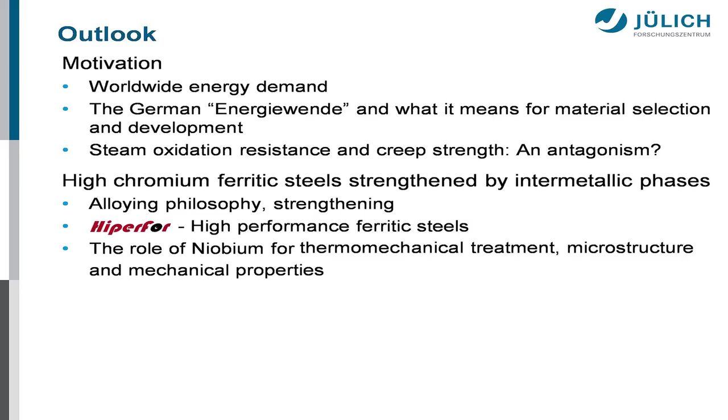I'm going to talk on the specific role of niobium for thermomechanical treatment, microstructure, and mechanical properties of our so-called HiperFer steels, which means high-performance ferritic steels, a further development of the steels described in the award-winning paper. In the end, I'm going to conclude my talk and give a short outlook on future perspectives, our development goals, and the partners we are working with right now.

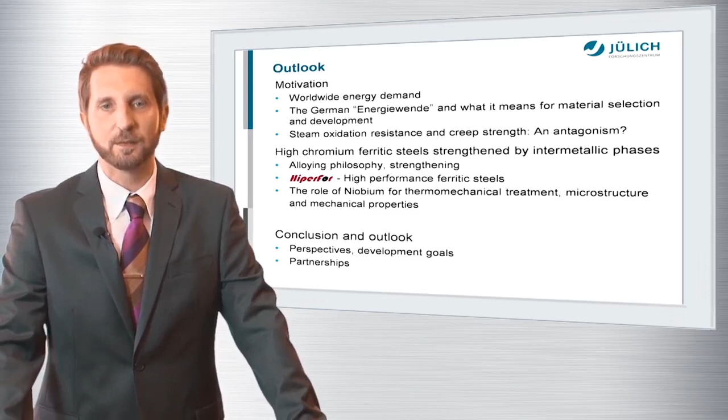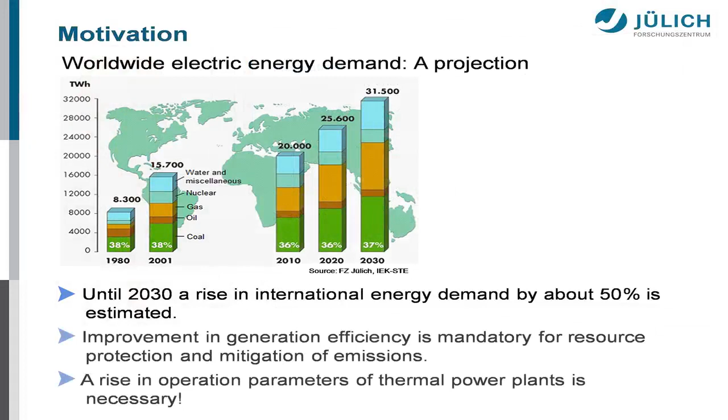Whatever projection on worldwide electric energy demand you look at, they all have in common that until 2030 they predict a rise in international energy demand of about 50%. That means that if we want to go for resource protection or mitigation of emissions, we have to reach some improvement in generation efficiency. And this is only possible by a rise in the operation parameters of thermal power plants. For this, we need new and improved materials.

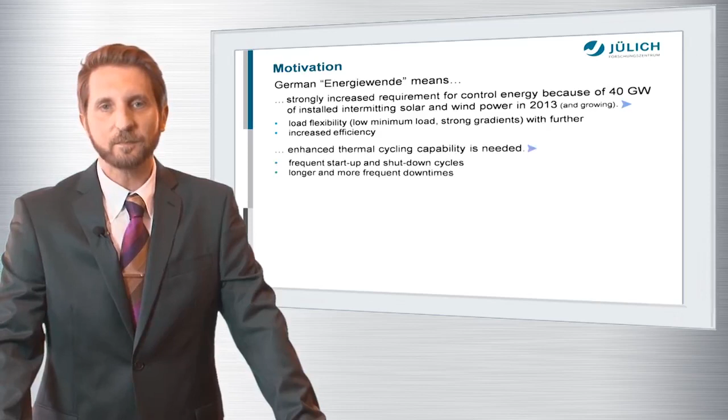Furthermore, the German Energiewende, which originally meant the turn away from nuclear power generation and in the future will mean the turn away from fossil sources of energy towards regenerative power sources, will pose a strongly increased requirement in the amount of required control energy, because in 2013 we already had about 40 gigawatts of installed intermittent solar and wind power. That means load flexibility in combination with further increased efficiency is already needed right now for the backing thermal power plants. This means enhanced thermal cycling capability will be needed in the future.

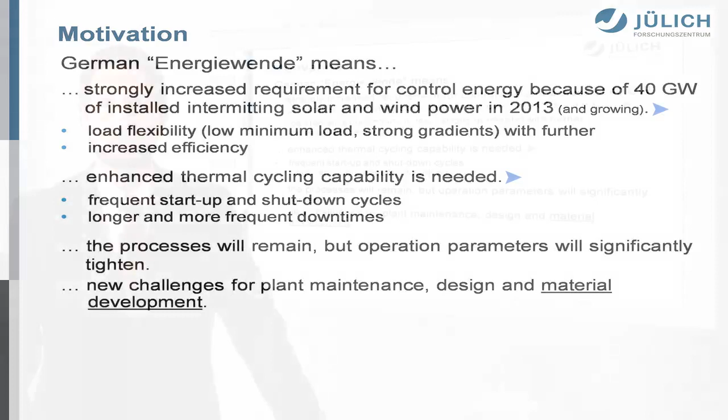We will have more frequent startup and shutdown cycles and longer and more frequent downtimes. To summarize this, in my opinion, the processes will remain, but the operation parameters will significantly tighten. That means, for sure, new challenges for plant maintenance, design, and especially for the design of future materials.

Let me give you a short introduction on the steam oxidation and creep strength properties of state-of-the-art 9 to 12 chromium ferritic martensitic steels. You can see them here lined up as a function of their chromium content, starting out with P92 as a 9 chromium steel, going up with higher chromium content to VM12 and X20, which are 12 chromium steels.

You can see the oxidation rate, represented by the black line, decreases with increasing chromium content. In turn, that means steam oxidation resistance rises with rising chromium content. But unfortunately, on the other hand, represented by the red columns, the creep strength of these materials drops with rising chromium content.

As we want to go up to higher temperatures of about 650 degrees C, if you want to maintain sufficient steam oxidation resistance, you have to go up in chromium content. This even sharpens the problem with the drop in creep strength with rising chromium content. This is, for example, due to Z-phase formation and delta ferrite formation, which troubles you with complete martensitic transformation upon cooling, and that leads to the drop in long-term creep strength.

To summarize this, in case of the state-of-the-art creep strength enhanced ferritic martensitic 9 to 12 chromium steels, creep strength and steam oxidation resistance together seem to be an antagonism. That is one of the main reasons why most, or let's say all, the efforts in creating new high-strength, sufficiently steam oxidation resistant 9 to 12 chromium steels failed during the last 20 years.

So having a look at the material classes that are available for power plant application, for structural application in thermal power generation, the most important material class today is the ferritic martensitic steels I've been introducing to you.

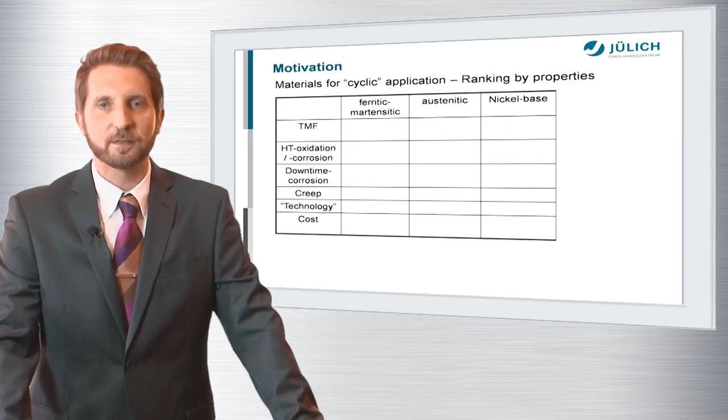Furthermore, we do have austenitic steels and high-performance nickel-based alloys. And in the motivation part, in the very beginning, I've been talking about cyclic power plant operation.

If we now rank these material classes by material properties which are crucial to cyclic operation, you first have to mention TMF, thermomechanical fatigue resistance. Even if the ferritic martensitic steels are the most important material class today, there is not a lot known about thermomechanical fatigue resistance of these materials.

All the ferritic martensitic materials are right now clearly limited by their high temperature oxidation and corrosion issues because of the relatively low chromium contents of about 12%. Creep is a property which is okay because they have been designed for that.

Technology means all the issues which are touched by production of semi-finished products, of components, and the construction and erection of whole power plants. This is not a problem because the materials are state-of-the-art, and cost is not a real issue because these are the benchmarking materials.

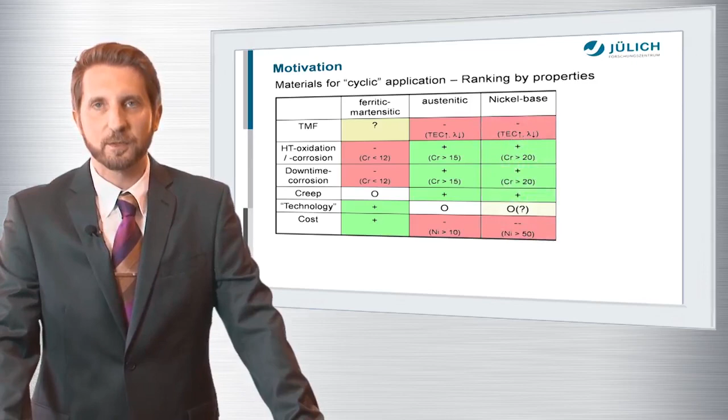If we now look into alternative materials like the austenitic and the nickel-based alloys, the picture is a little bit reversed, a little bit different. Typically, their thermomechanical fatigue resistance is considered to be worse because their thermal expansion coefficients are much higher and their heat conductivities are lower. Oxidation and corrosion issues should not be a problem because most of these grades feature chromium contents higher than 15% or even 20% in case of the nickel-based alloys.

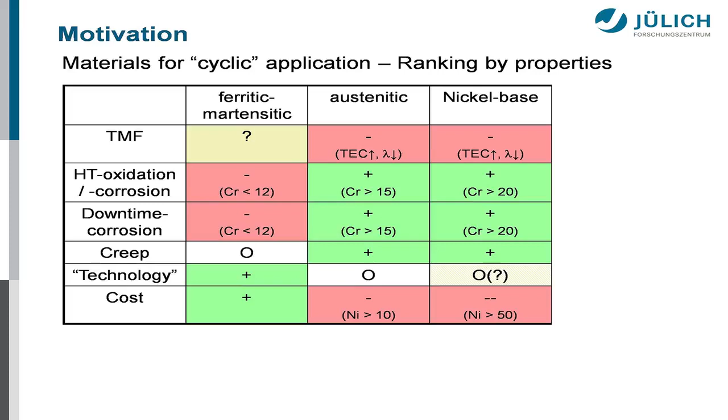Creep resistance is not a problem too because these materials are stronger. Technological issues are, let's say, more or less solved because a lot of money has been invested, especially in the nickel-based field during the last 10 to 15 years.

But for sure, what is a problem today and will remain a problem is the higher cost implied by the use of austenitic steels and especially high-performance nickel-based alloys, because the nickel contents, especially in case of the nickel-based alloys, are higher than 50%, which leads to exaggerating costs.

So the question is, there is a fourth material class, the ferritic steels. These steels traditionally are not regarded for structural application in high-temperature power generation, for the reason that this material class is typically considered to be not creep strong enough.

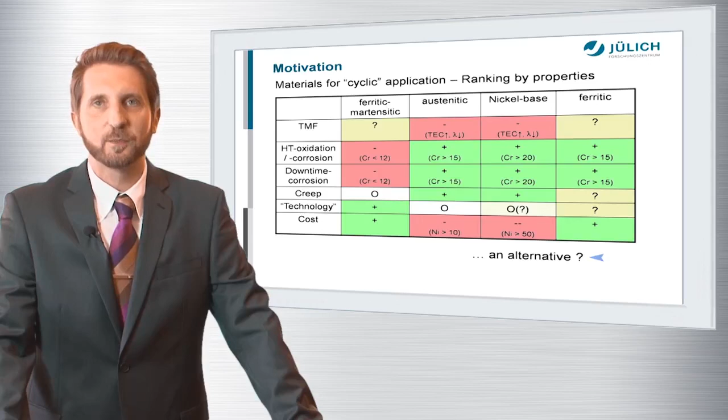But what is for sure is that corrosion issues should not be a problem, because the ferritic stainless steels mostly feature chromium contents higher than 15%, which would be enough. And cost should be another advantage because they will not be much more expensive than the ferritic 9 to 12 chromium steels. But if you have a look into the ferritics column, you see that a lot of question marks gather in this column.

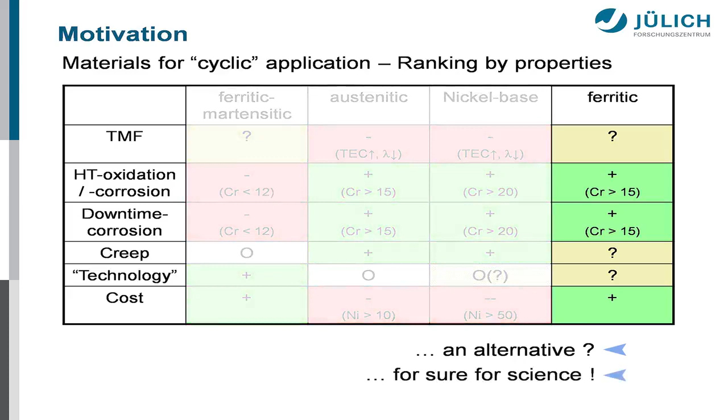The question is, could such a material based on a fully ferritic steel be an alternative? And because there are so many question marks, our decision was: for sure this is interesting for science, so let's see if this can be interesting for practical application too.

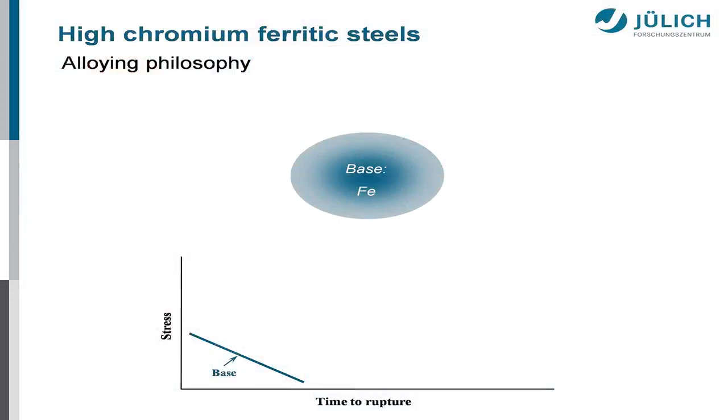So this was the starting point of materials development, the starting point of the development of a fully ferritic, high chromium stainless steel. You start out with an iron base, you put in some solid solution strengtheners like chromium, tungsten, and niobium. Chromium was included for corrosion resistance and steam oxidation resistance, and the solid solution strengthening mainly stems from tungsten and niobium.

So this solid solution strengthening gives a boost in the creep strength of the matrix, but this is still not enough. So we'll go further for precipitation strengthening.

You put in some more tungsten, some more niobium, a little bit of silicon. You restrict the nitrogen and carbon contents to very low levels to force the precipitation of a mixed Laves phase. The composition is given up there on the slide.

Now I have to point out that our materials are completely ferritic at any temperature, so they do not undergo martensitic transformation upon cooling.

And that means that if you want to go for enhanced dislocation strengthening, like it is done in the martensitic steels just by the martensitic transformation, you have to go for specialized thermomechanical treatment. This gives another great leap in creep strength, but as always in high temperature materials, whether this boost in creep strength is really stable is a question of microstructure stability in the long term.

Historically, our steel development dates back to the commercial grade Crofer 22 H, a 22 chromium ferritic stainless steel designed at our institute together with VDM Metals in Germany. Originally this grade was developed for application in high temperature solid oxide fuel cells, for a temperature range of about 700 to 900 degrees C.

In the course of this alloy development, approximately 45 trial alloys were produced. Some featured fluctuations in chemical composition, like lowered chromium content in the low chromium alloy, differences in tungsten content for the zero titanium alloys as named on the slide, differences in niobium content, fluctuations in silicon content, and changes in titanium content. The mechanical properties showed very promising results, for example for creep strength at lower temperatures in the range of 600 to 650 degrees C, which is what we described in the award-winning paper.

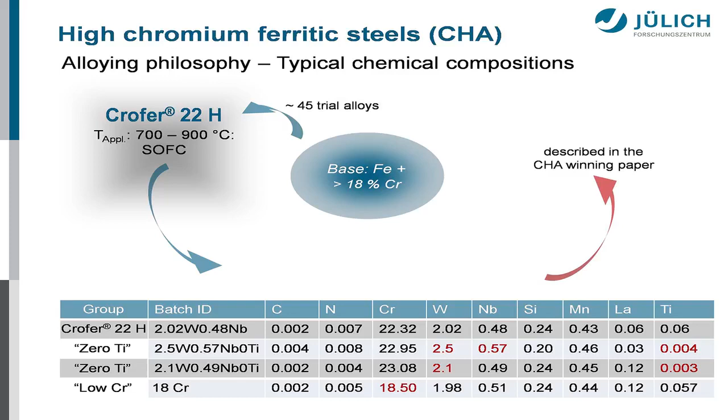So what is the specific role of niobium in these alloys? To answer this, we have to look into some simplified phase diagrams, but I'm not going very deeply into detail.

To keep it simple, if you want to strengthen a fully ferritic steel by intermetallic phases using just simple tungsten alloying, you have to go up to a tungsten content of approximately 7 weight percent to reach sufficient creep strength. That means such an alloy would be very expensive, hard to process, and if you think about weldability, such a high tungsten alloy would be a nightmare.

If you go instead for combined alloying with niobium, as shown on the right-hand side, you see that very small amounts of niobium are already sufficient to reach reasonable creep strength in these materials. This is due to the formation of the mixed Laves phase that I mentioned a few slides ago.

So frankly speaking, to keep it simple, niobium replaces tungsten. It is incorporated into the Laves phase and refines it, forming smaller particles. Furthermore, it boosts precipitation kinetics of the Laves phase and forces a so-called high-temperature Laves phase with a higher dissolution temperature.

That can be seen on the right phase diagram, represented by the blue curve. The dissolution temperature is somewhere close to 970 degrees C. In comparison, the Laves phase in the 7 tungsten alloy dissolves at approximately 670 degrees C, so the Laves phase in the combined alloying material should have much better long-term stability.

What is also beneficial with niobium alloying is that you do not form the Chi phase. The Chi phase is represented by the red curve on the left-hand side, and you see that in the application temperature range of approximately 600 to 650 degrees C, there's a very steep phase change from the Laves phase to the Chi phase. This is really not what you want if you think about cyclic application, where you have temperature fluctuations quite frequently.

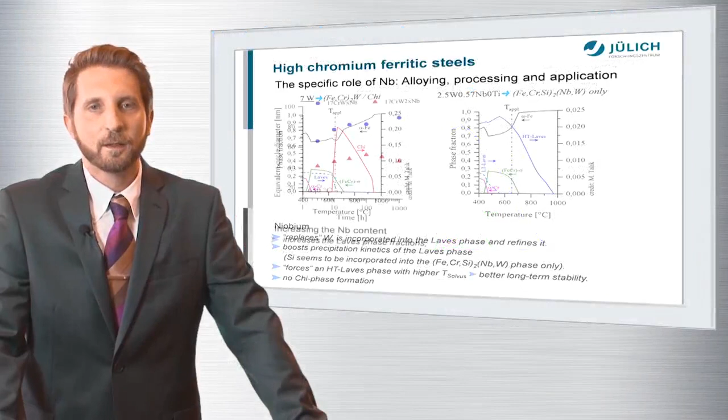So if we now increase the niobium content, it raises the volume fraction of the Laves phase. This is shown in these two micrographs taken from 650 degrees C annealing after 3 hours. The upper picture is from one of our new trial alloys with 17% chromium.

This alloy has a specific tungsten content and a single niobium content. The lower picture is from an alloy quite similar considering the chromium and tungsten content, the only difference being that the niobium content is doubled. What you can nicely see is that the alloy with the higher niobium content forms much smaller particles, reflected in the particle diameter as a function of time in the diagram.

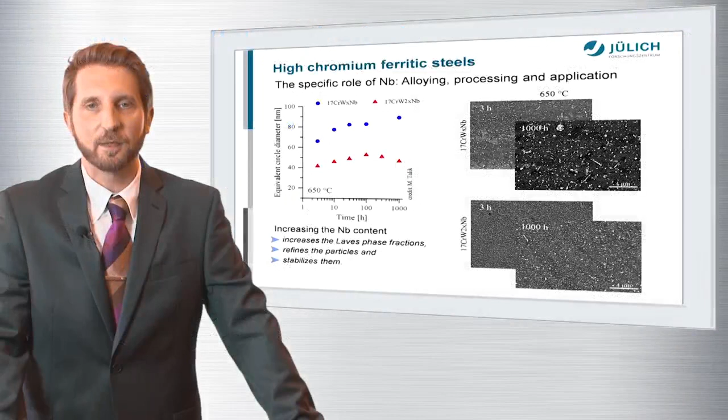The blue curve is for single niobium alloying, the red curve is for double niobium content, and you see the particles are much smaller. In the long term, up to 1,000 hours so far, the higher niobium content seems beneficial for stabilization of the particles, which can be nicely seen in the micrographs taken after 1,000 hours. Doubling the niobium content leads to less coarsening of the particles, which is very beneficial for long-term application of such alloys.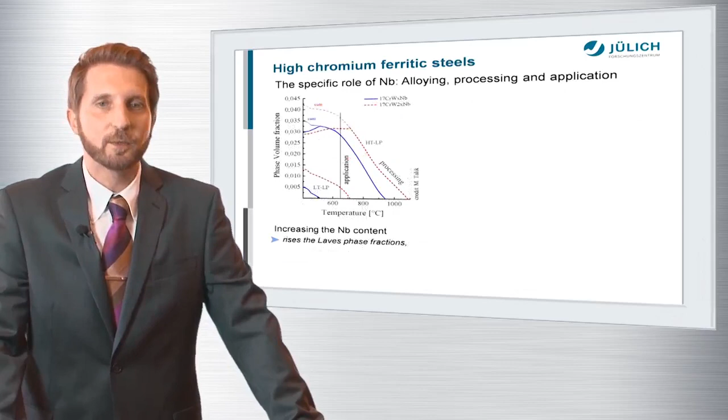Furthermore, doubling or increasing the niobium content does not only have a direct impact on application, it also has a direct impact on processing, and this is depicted in that graph. Again, the color code is the same: blue is the base composition, red is the composition with doubled niobium content. You can see that on the high temperature end, the dissolution temperature shifts by approximately 100 degrees C, and this does not only lead to higher long-term stability, it also means we have to change the process if you go for rolling or forging of these materials.

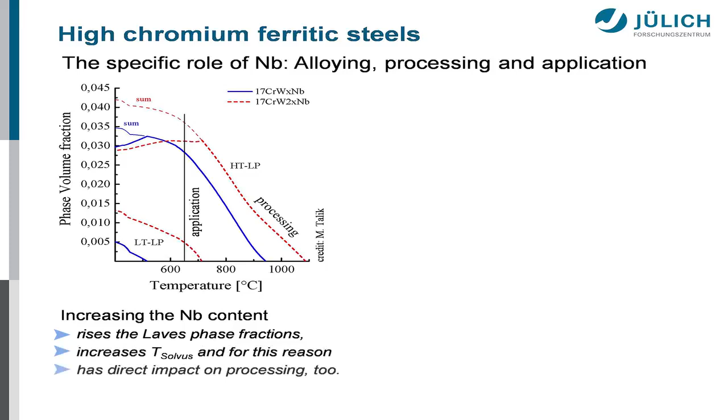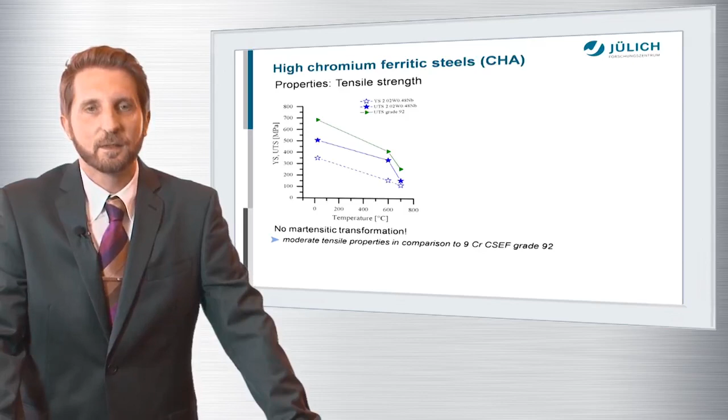So now coming to the properties, starting out with mechanical properties, the tensile strength. As I already pointed out, our materials are fully ferritic. We do not have martensitic transformation, and that's the reason why we only reach moderate tensile properties in comparison to a 9 chrome steel, grade 92, represented by the green curve, the green triangles. The filled blue stars represent a chemical composition quite close to the commercial Crofer 22H alloy, and you can see it's far below, but this is not really a problem because we can alter the tensile properties just by processing, which is what I'm going to demonstrate to you in the following.

At first, we'll have a look into creep strength, this time for 600 degrees C. There are 3 groups of alloys. First is the Crofer 22-like specification, which features a chromium content of 22 weight percent, a tungsten content of 2%, and a niobium content of approximately 0.5%. There is a group of alloys with higher tungsten and niobium contents, and a low chromium version, which has the same tungsten and niobium content as the Crofer 22H specification. This alloy just features a lower chromium content of about 18 weight percent.

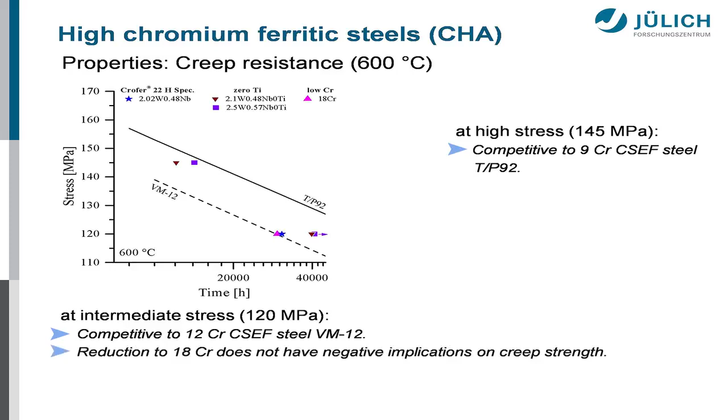If we compare the creep performance of these trial alloys to ferritic martensitic grades to benchmark this, we see that at a high stress level of about 145 MPa, the higher tungsten and niobium alloys are competitive to the 9 chrome grade TP92, which is the benchmark today in power plant application. At an intermediate stress level of about 120 MPa, the baseline Crofer 22 composition is still competitive to the most steam-oxidation-resistant 12 chromium ferritic martensitic steel VM12, and the higher tungsten and niobium content materials perform much better.

What is a very interesting and important finding in this circumstance is that the reduction to 18% chromium does not have negative implications on creep strength. Just compare the creep performance of the original Crofer 22H specification and the low chromium, 18 chromium version. You see that there's not a big difference, and this is really an interesting finding which was documented in the award-winning paper.

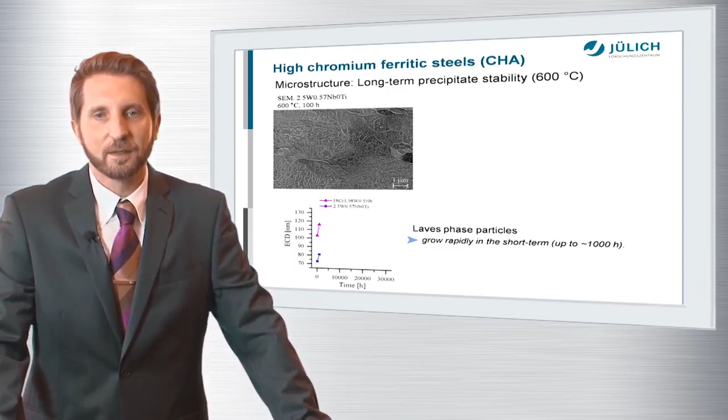Some more words on secondary phase formation. Always when you're talking about ferritic high chromium stainless steels, you have to deal with the sigma phase, and this phase is very undesirable because it segregates preferentially to grain boundaries. If it forms continuous films at the grain boundaries, it might deteriorate the ductility in the long term, which is very undesirable. Unfortunately, the sigma phase forms in all the 22 chromium alloys, as you see in the micrograph. But, and this is very beneficial, the cutback in chromium content to 18 weight percent helped a lot to mitigate formation of the iron chromium sigma phase.

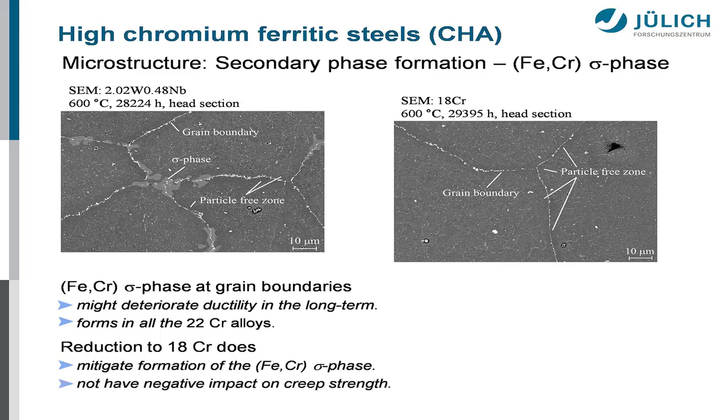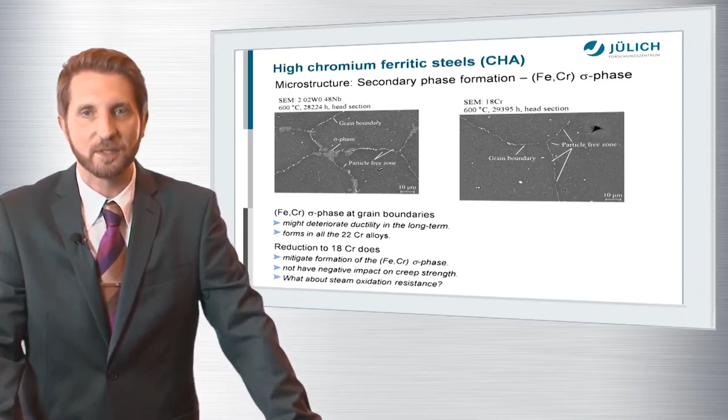And like I demonstrated to you some slides ago, this does not have negative impact on creep strength, but the question remains, what about steam oxidation resistance if we cut back the chromium content? And this is what you can see here.

This diagram depicts weight changes or weight gains during annealing in simulated steam environment at 600 degrees C. On the upper end you see the performance of the 9 chromium martensitic steels, approximately an order of magnitude lower the performance of the 12 chromium steels, and approximately another order of magnitude lower at the lower end of the high chromium ferritic steels.

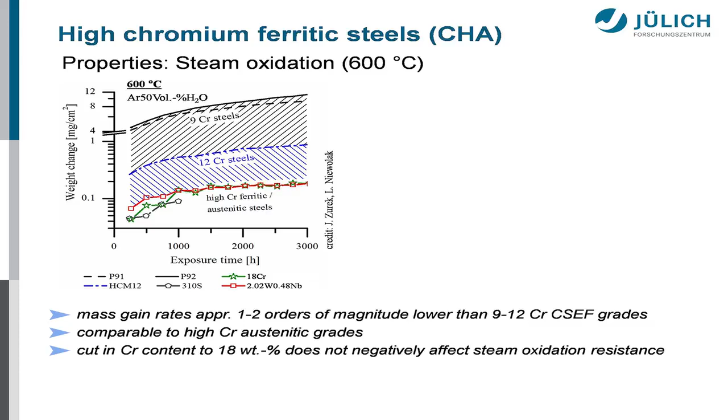We have the weight gain rates of our high chromium ferritic steels, which is mostly comparable to high chromium austenitic grades. What's nicely depicted here is the comparison of the green 18 chromium curve and the red 22 chromium curve. They're more or less on the same level, meaning the cutback in chromium content to 18 weight% does not negatively affect steam oxidation resistance, which was one of the basic findings in the award-winning paper.

As a preliminary conclusion, we can state that ferritic steels, which are strengthened by intermetallic phase particles, offer promising creep strength and favorable steam oxidation resistance in combination, which is quite a unique thing. But there remain questions beyond.

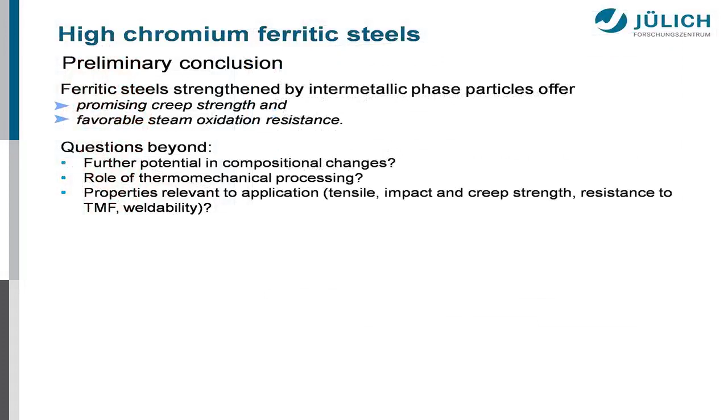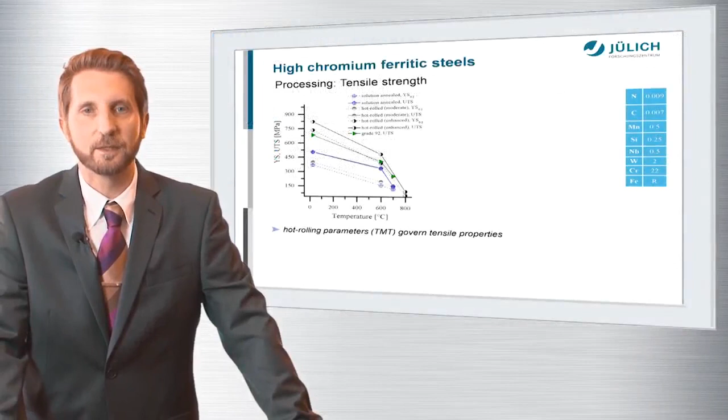The first question for sure is, what is the further potential in compositional changes? What is the role of thermomechanical controlled processing? And what properties relevant to application can be reached with that? This is what we concentrated on during the last approximately 2.5 years.

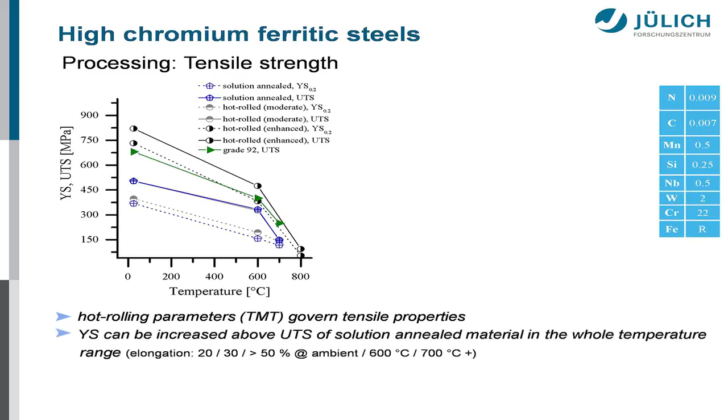Coming back to tensile strength, again doing the benchmarking against the martensitic grade 92, you can see that by changing the hot rolling parameters, the yield strength of our high chromium ferritic steels can even be tuned beyond the ultimate tensile strengths of solution annealed material. This can be done over the whole temperature range with still sufficient and reasonable ductility. The takeaway message is the tensile properties we can reach in our fully ferritic grades are comparable to ferritic martensitic grades.

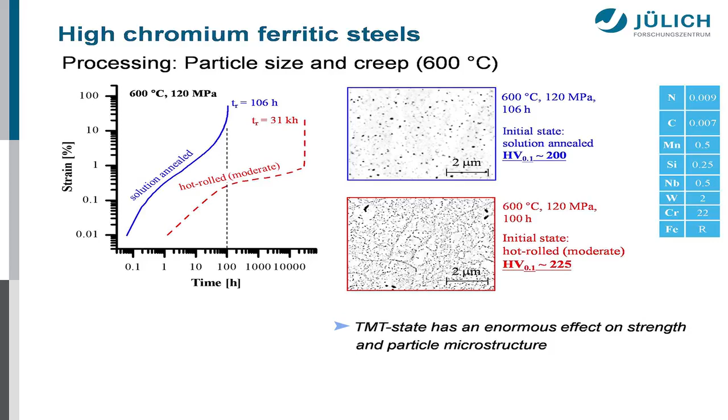But if you do the same experiment with a moderately hot rolled material of the same chemical composition, you can see in that micrograph below in the red box, the number of particles is much higher than in the solution treated state. The particles are much smaller, and this has a very decent impact on the creep properties. The shape of the creep curve changed quite a lot, and rupture appeared after approximately 30,000 hours. So a thermomechanical treatment state has an enormous effect on creep strength and particle microstructure.

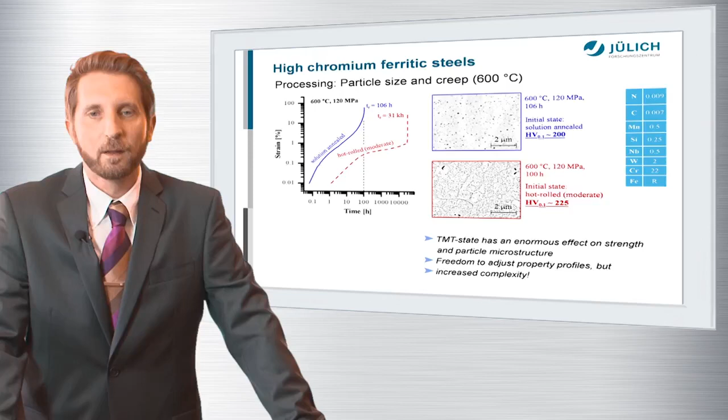This means, on the one hand, that we have great freedom to adjust property profiles, but on the other hand, this means that such materials will for sure be more complex in development and processing than the materials that we have today.

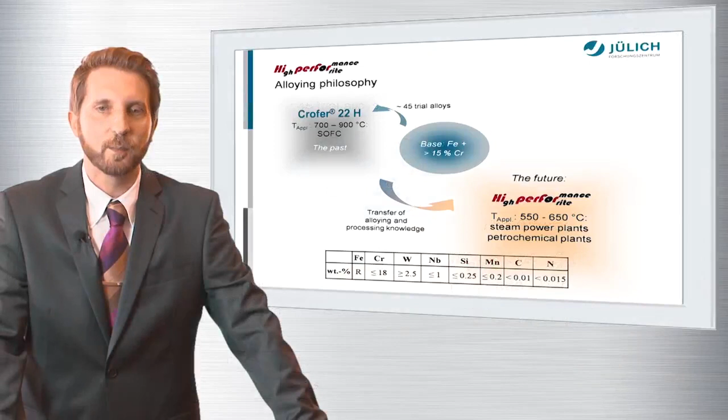So, coming back to that representation of what we did in the past, taking all this knowledge on alloying and processing together, we right now try to transfer this into a new material class, which is called the high-performance ferrite materials, and we're going to optimize this for steam power plant application in a temperature range of 550 to 650 degrees C, or maybe even for application in petrochemical plants where higher corrosion resistance is needed.

All of these trial alloys feature a further reduced chromium content of about 17%, combined with enhanced tungsten and niobium content for increased Laves phase formation, and optimized rolling parameters, and for this reason yield creep strength which is already far beyond the ferritic martensitic grade 92. This is achievable without sigma phase embrittlement. This makes us very proud. But most of the very interesting long-term low-stress experiments are still running, still in progress.

So I've been talking about thermomechanical treatment quite a lot, being aware of the fact that it's not desirable to first invest a lot of effort tuning a microstructure by processing, and then later destroy it by welding. So we had a look into heat treatment too.

Furthermore, these heat treatments are very effective in homogenizing the hardness profiles after welding, and they do not harm the creep strength of the hot rolled material. So this really opens up the gate to application, for example, in the solution treated state where you don't have to go for thermomechanical processing.

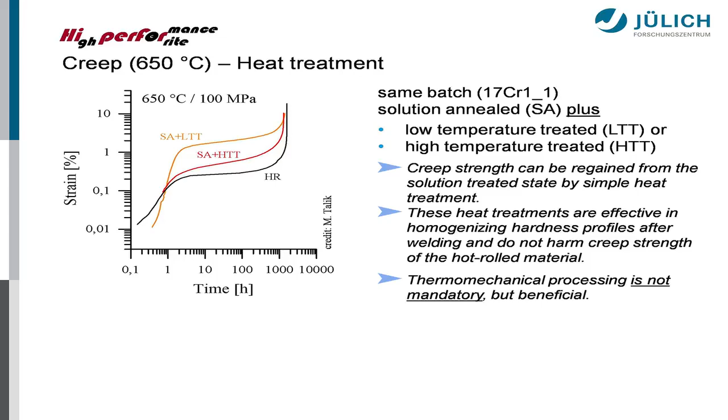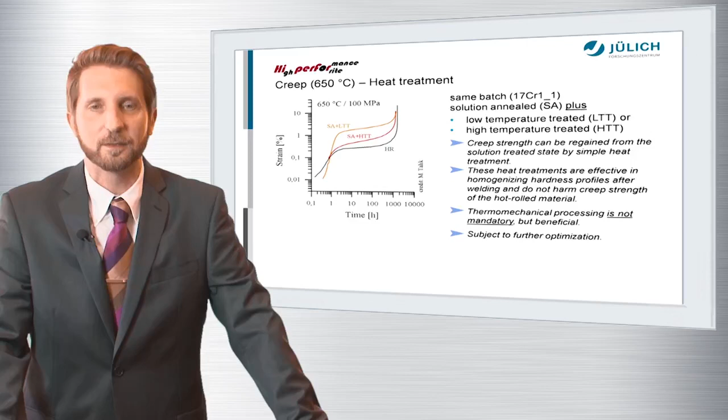So the takeaway message is thermomechanical processing is not mandatory, but it can be very beneficial if you want to go for very high strength applications. For sure, this is still subject to further optimization, so we're far away from being finished with that.

In the motivation part, I've been talking about thermomechanical fatigue resistance for cyclic power plant operation. And that is why I brought some data on thermomechanical fatigue.

What is done in a thermomechanical fatigue test is you just take a specimen and cycle it through a given temperature range, in this case from 50 to 650 degrees C, employing quite steep heating and cooling rates, in this case 10 Kelvin per second. You do not go for holding times at the minimum and maximum temperatures because you want to restrict creep as far as possible.

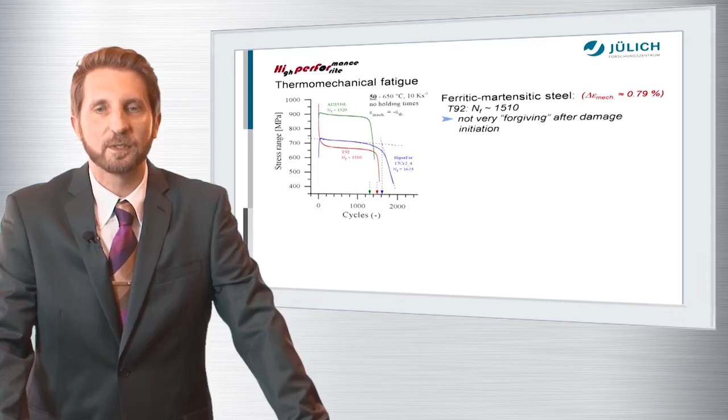Red is a ferritic martensitic grade, again T92, the most creep-resistant material available today. It reaches a very high stress range in the initial state because of excess dislocation density from martensitic transformation. But this recovers quite rapidly during the first, let's say, 50 cycles before the material enters a stable phase, and after approximately 1500 cycles, damage and failure comes quite rapidly, so the material is comparatively unforgiving.

In case of the austenitic grade, here alloy 316, represented by the green curve, you see that this material performs completely differently. You do have pronounced hardening in the initial phase, then you again enter a stable phase, and after approximately 1300 cycles, damage comes rapidly too. So obviously this material seems to be unforgiving too.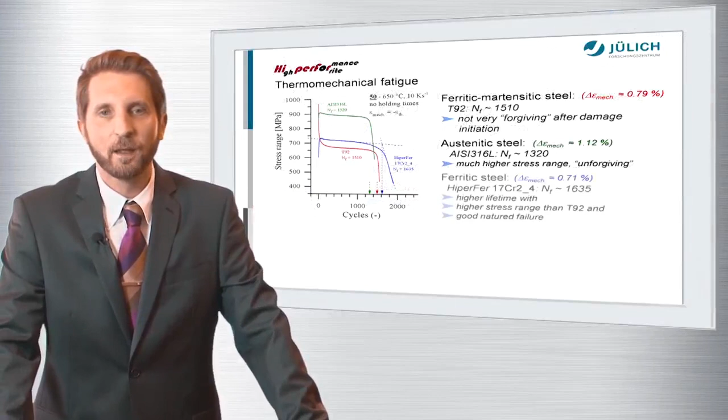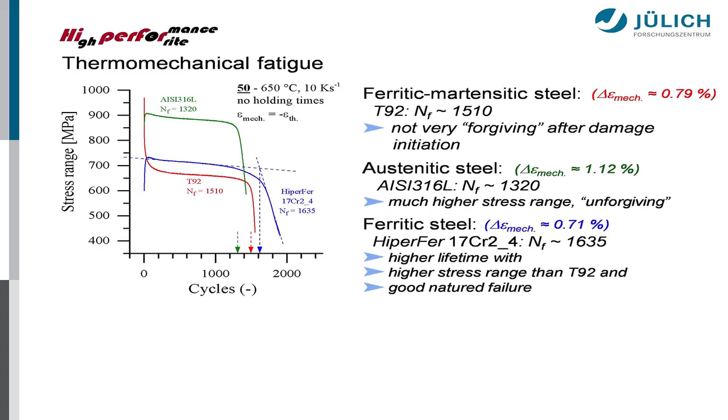And the blue curve represents our new ferritic HiperFer 17Cr2_4 grade. This one reaches higher lifetime in combination with higher stress range than, for example, the ferritic martensitic grade, and it seems to have more decent failure behavior, which is quite positive.

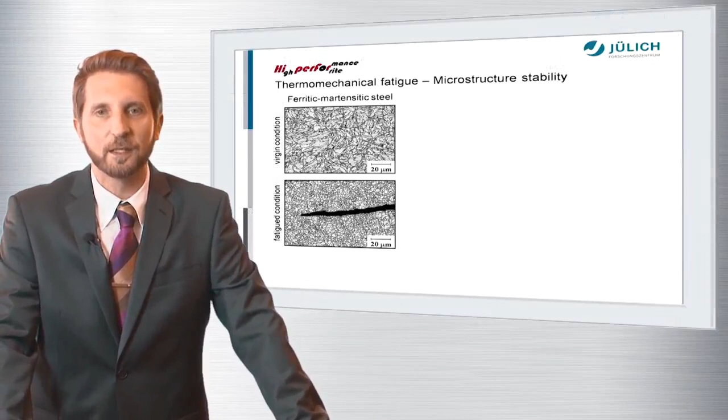The microstructural reason for this behavior is the following: if you take the ferritic martensitic steels, you can see in the virgin condition this well-defined martensitic microstructure, and in the fatigue condition depicted below, this microstructure is completely lost. Ferritic martensitic steels suffer pronounced recrystallization in severe thermomechanical fatigue loading, which later causes premature failure.

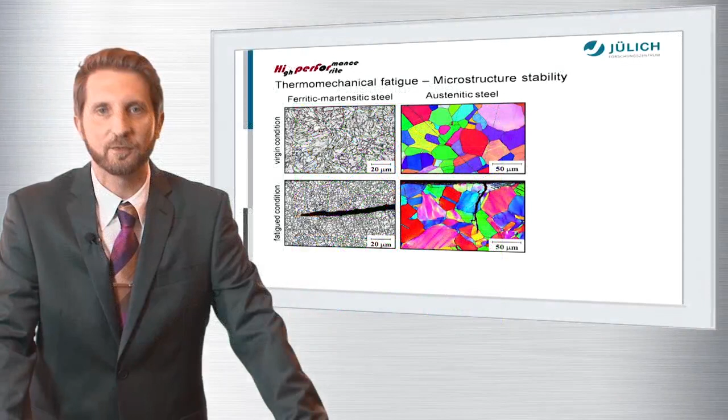In case of the austenitic steel, such recrystallization does not occur, and the grain structure is completely stable over the whole range. The premature failure is more or less owed to the comparatively high thermal expansion coefficient of these materials, meaning the amount of plastic strain energy per cycle is much higher than for the ferritic martensitic and ferritic steel. In case of the ferritic materials, microstructure remains stable too, so we don't suffer any recrystallization.

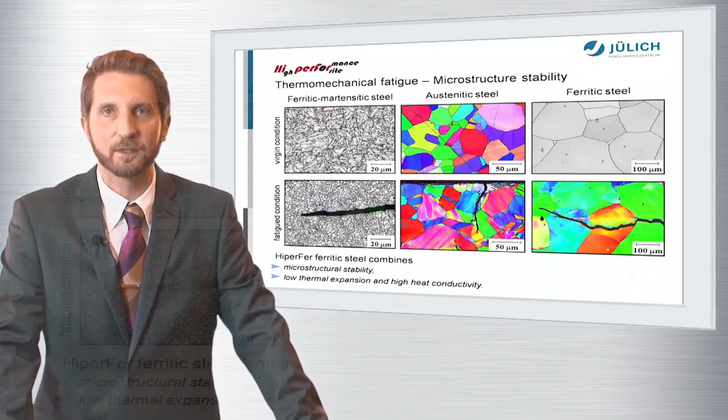To summarize this, we can say that our HiperFer ferritic steels combine microstructural stability, low thermal expansion, and high heat conductivity, and this is very beneficial. For this reason, they reach the longest lifetime in thermomechanical fatigue loading.

So the last thing I'm going to talk about is impact strength. This is a property which is mostly demanded by design codes, which have to be taken into account in power plant construction.

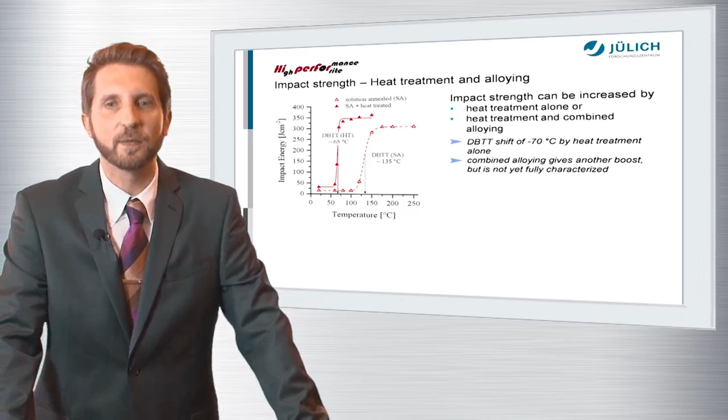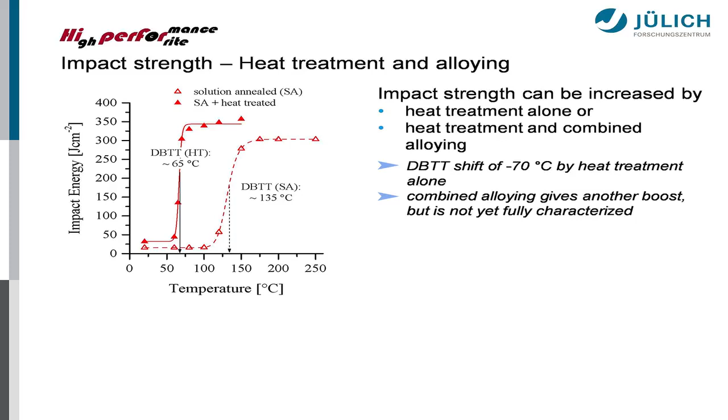But we were able to prove that by simple heat treatment, a ductile to brittle transition temperature shift of approximately minus 70 degrees C can be achieved. So in a solution annealed and heat-treated state, the ductile to brittle transition temperature is approximately at 65 degrees C, and we already found out that with combined alloying, we can further decrease this. We're able to increase the lower shelf energy, and we're very positive that we are able to stick to the European regulations. So for sure, this is another topic which is still subject to further optimization, and right now we're about to implement this heat treatment into our lab scale production.

So what do we want to go for in the future? What are our desired future applications for the high performance ferrite family? First, for sure, there are applications where ease of processing, weldability, and impact strength play a major role, for example, thin wall components like tubes or sheets. This is what we want to develop or further develop the HiperFer grades for.

These would be alloys which will be applied in the solution annealed state. That means we have to go for changes in chemical composition to increase creep strength.

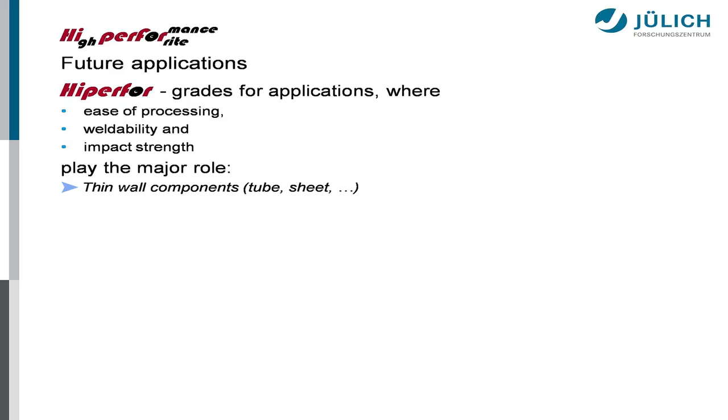On the other hand, we're going to further develop another spin-off of the high-performance ferrite family, the so-called Hiperforge materials. These will be grades with an optimized thermomechanical processing for applications where weldability does not play a role, but, for example, increased short-term or low-temperature tensile properties are beneficial, like in blading applications, or where good stress relaxation properties are desired, for example, for bolting applications.

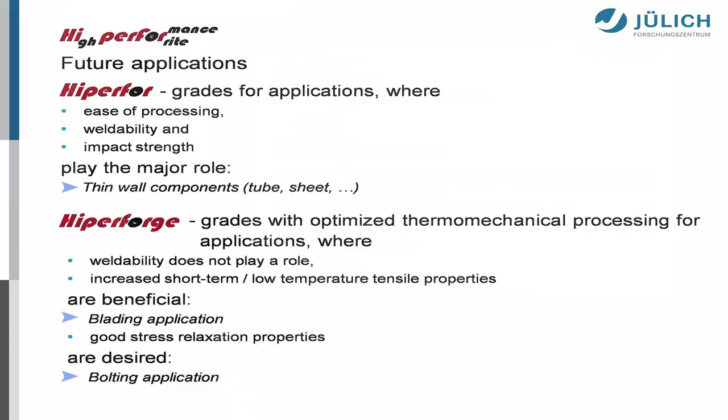So for this reason, we produced a couple of new trial melts with approximately double Laves phase content of about 7 volume percent. These materials will have enhanced mechanical and further improved impact strength properties. And we're going to further decrease the stability range of the undesired iron chromium sigma phase to temperatures of approximately below 550 degrees C.

Together with our partners from Oak Ridge National Labs in the USA and voestalpine Böhler Welding, first matching shielded metal arc welding electrodes were developed, and first SMAW and TIG welds were produced.

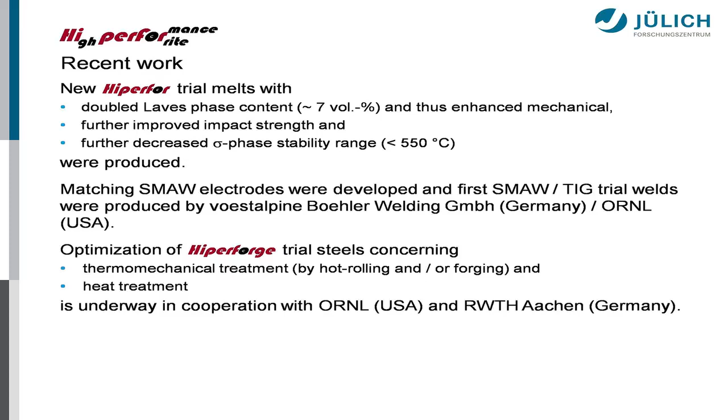Concerning the optimization of the Hiperforge trial steels, we're working on optimized hot rolling and forging parameters. We're looking a little bit more into heat treatment alone. And this work is done again in cooperation with Oak Ridge National in the USA and partners at the Technical University of Aachen in Germany.

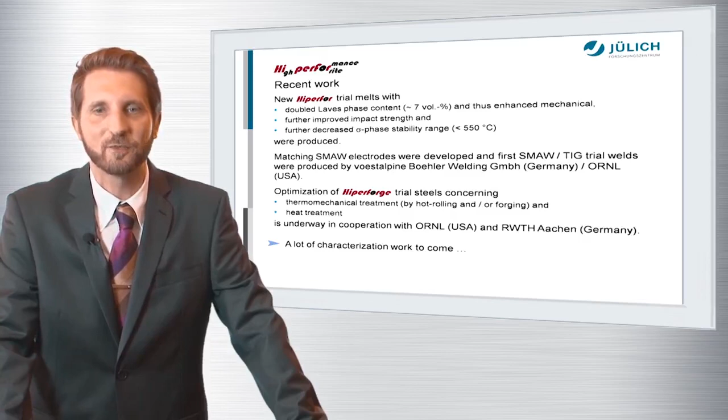So for us, this means there is a lot of characterization work to come in the future, which I'm really looking forward to, because this is a very rewarding job, putting things into effect that came from your idea and later on seeing that it works.

So in the end, there's nothing else to say for me than thank you to the colleagues at Forschungszentrum Jülich, because such a development cannot be achieved by one person alone. The list is quite long. Some of the colleagues already left for retirement, others went for other jobs. I want to particularly mention the colleagues at Oak Ridge National, namely Yukinori Yamamoto, Ying Yang, and Pete Tortorelli. I want to mention the colleagues at voestalpine Böhler Welding in Germany, in Hamm, Martin Schmitz-Niederau and Olena Trunova, and the colleagues at the Technical University of Aachen, namely the Institute of Ferrous Metallurgy, Mr. Dickert, who now left for an industry job, Mr. Schulte, Mr. Stieben, Professor Bleck, and Mr. Hessling. And in the end, thank you very much for your kind attention.